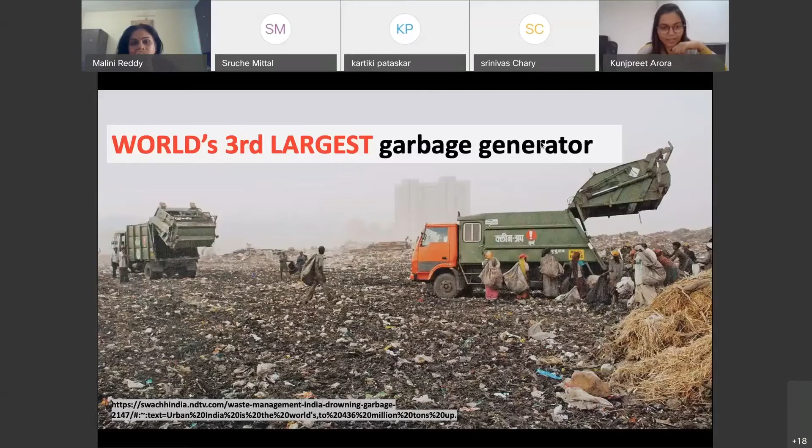As you all know, today India is the world's third largest garbage generator. Plastic is the major contributor to this waste - we produce around 9.5 million tons of plastic waste annually. The second largest waste contributor is 20 to 30 million tons of construction waste.

So here we are with bricks that convert this plastic and demolition waste together using our eco-friendly and sustainable technology to make good quality bricks. These bricks are 30% lighter in weight, 80% waterproof, and 20% stronger compared to standard red clay bricks.

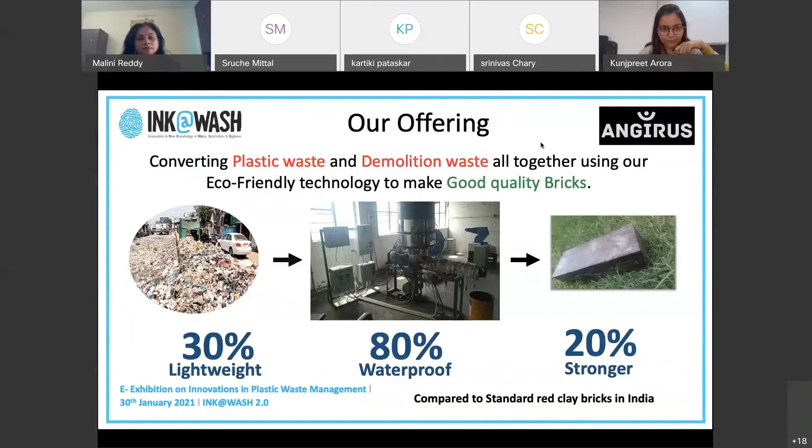Why did we choose the brick industry? Because the brick industry today is the second largest most polluting industry, and India is the second largest producer of bricks after China. It uses 25 million metric tons of coal, fertile soil and water, and only operates for 6 to 8 dry months, making it a highly unsustainable industry for our country.

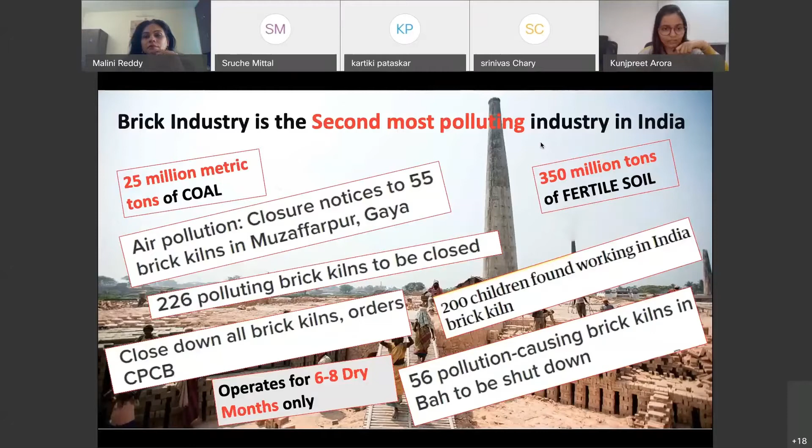If we look at our process, can you play this video? Our process is very eco-friendly and sustainable.

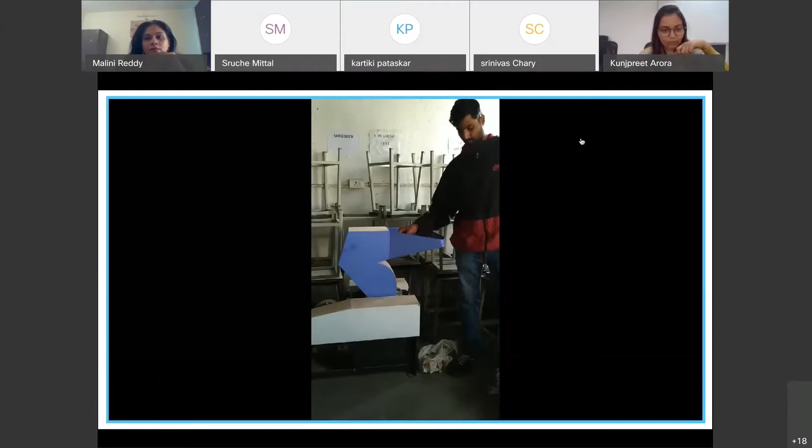It comprises a few simple steps where we use a crusher for crushing demolition waste. Then this waste is segregated and sieved into the required mesh. On the other side is the plastic waste - we use a shredder to shred this plastic waste according to our requirements. This is the shredded MLP PET that we use to make these bricks.

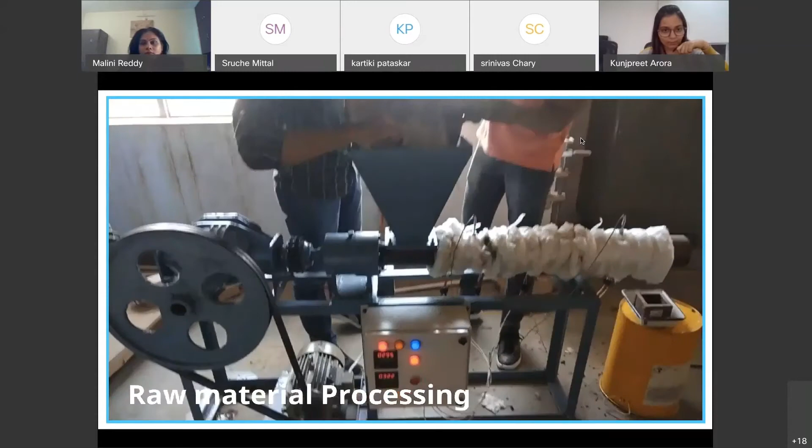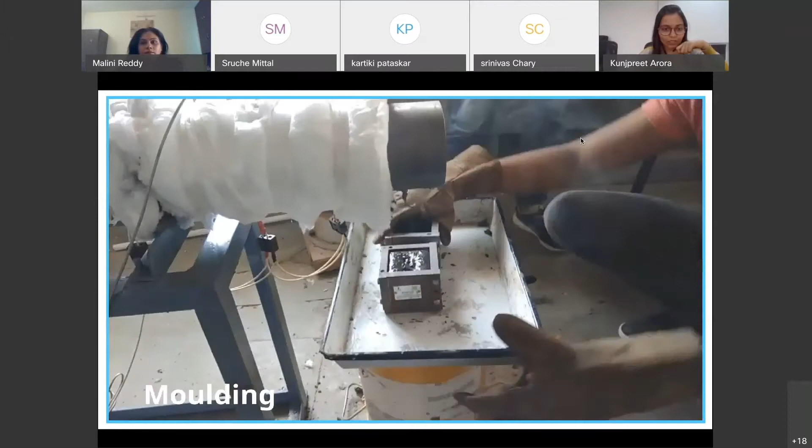It goes to the extruder, which is designed by our own team and for which we are filing a patent. The whole process involves mixing, drying, and compacting, then it goes into molding. Here we show a small cube because it was easy to record this, and then it goes for compression.

So comparing the parameters, why our bricks are better in quality - it's only one day manufacturing compared to other bricks. Also, the bricks are recyclable - you can send them back after 50 to 60 years to the manufacturing unit, get them recycled, and sell them again into the construction industry. It is waterproof, recyclable, lightweight, and the cost, which is the main parameter, is also very equivalent to other bricks.

Even in some areas it is cheaper. If we compare tier 1 and tier 2 cities, it is cheaper than red clay bricks or other kinds of bricks in the market.

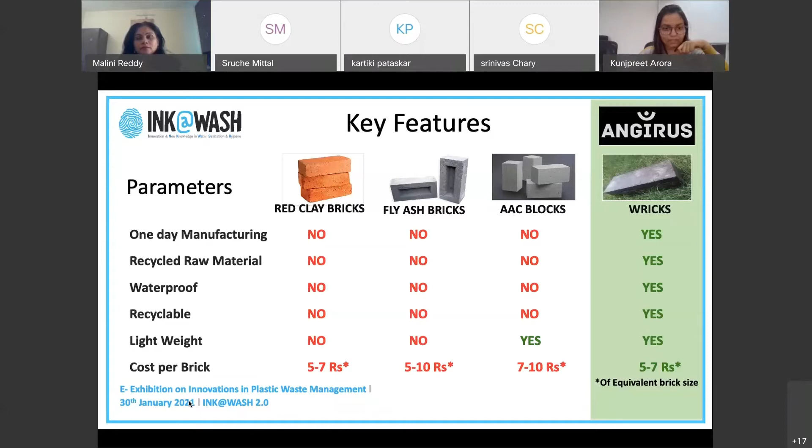We are proposing these bricks for non-load-bearing structures and secondary structures like boundary walls for government schools, public toilets for rural India, and government offices. Also, since these are waterproof, we propose them for sewage tanks and underground tanks. These bricks can also be used for paving in gardens and garden walls.

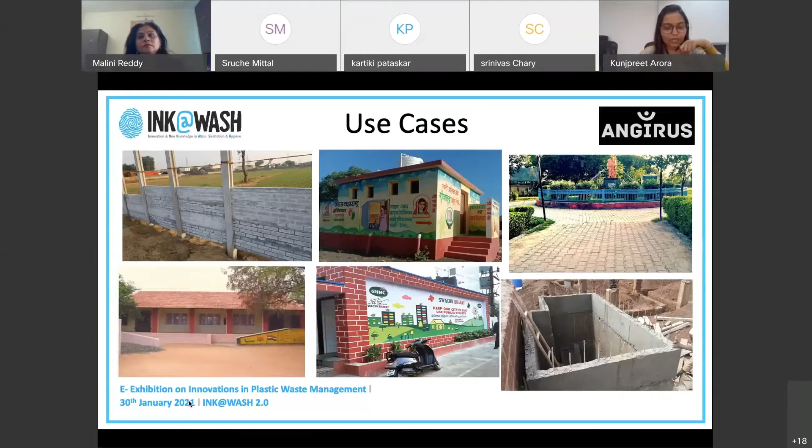We are giving back to society with these bricks, which can be used by local urban bodies. Looking at the initial impact we can create, we are forecasting to sell around 5 lakhs of bricks in 1 year, which can reduce around 1,250 tons of waste per year, generating 25 lakhs of revenue, and hence reducing this whole amount of waste with zero residue left behind.

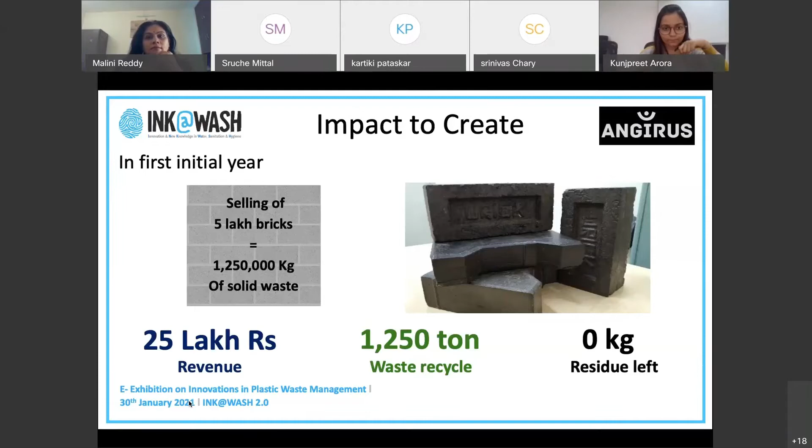It is environmentally sustainable. We are using 100% waste material, including 30% plastic waste. We use no water, no soil, no coal, no cement, or any other chemical - only 100% waste that would otherwise be thrown into the dumping yard or landfill.

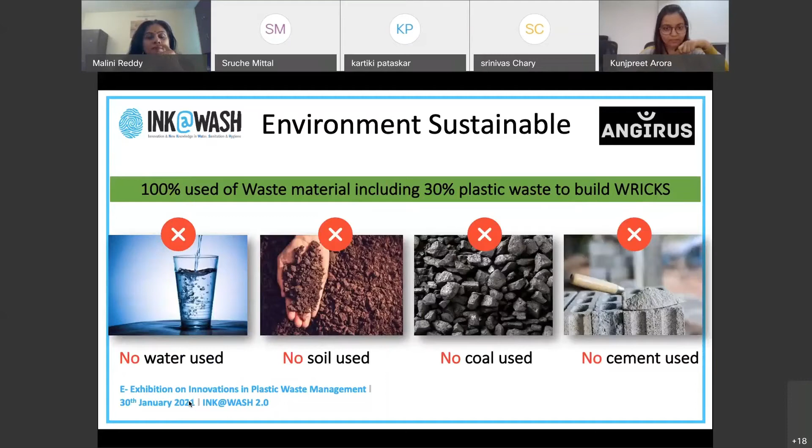These are some of the samples. It is NABL approved, tested in a NABL approved laboratory. The compressive strength is equivalent to first class red clay bricks, which is 10 megapascal, and water absorption is only 4%, compared to red clay bricks which have 20%.

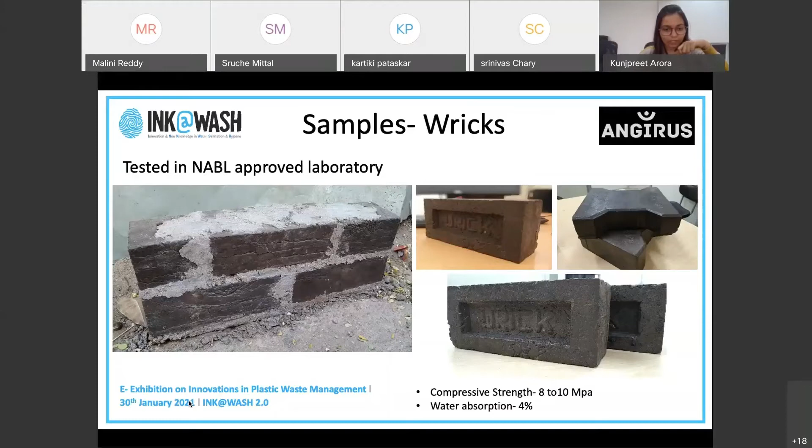Our approach: we need help from local government bodies or urban bodies to provide the waste. This waste is collected, segregated, and sent to our manufacturing unit, Angirus Brick Manufacturing Plant, where we convert plastic and construction demolition waste into bricks, which are sent to contractors and government officials at minimal cost, 5 or 6 rupees per brick. This can be used for affordable housing schemes, RPM schemes, schools, public toilets, community structures, infrastructure, etc.

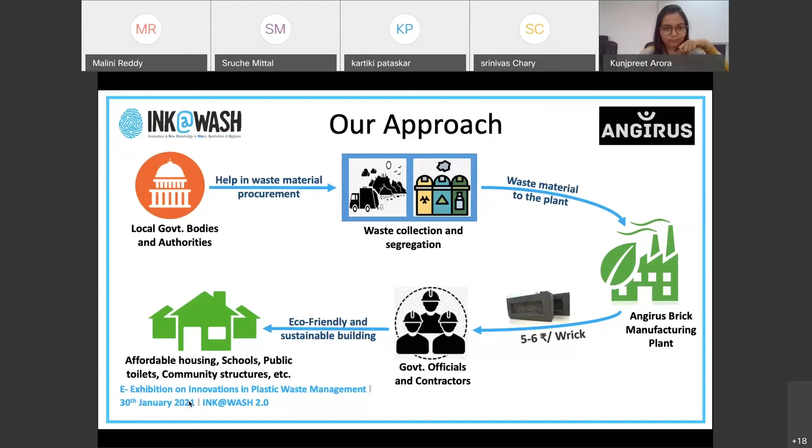Now I leave this to you to choose smartly. Do you choose red clay bricks, which release 100 grams of CO2, or do you want to use our bricks, which use 2.5 kg of waste, including 30% plastic waste?

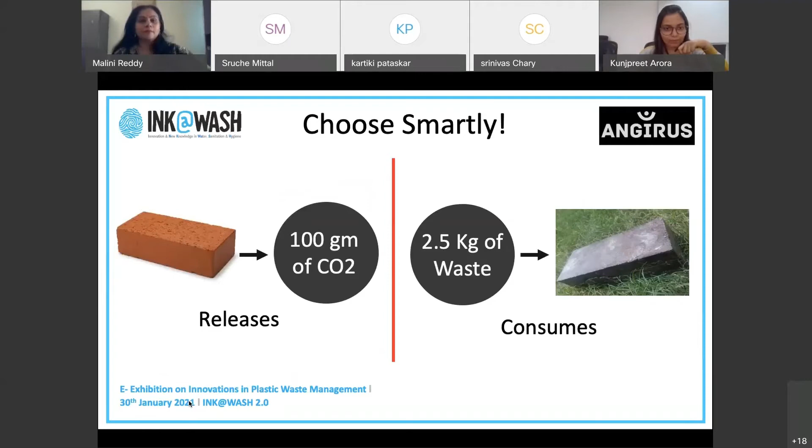Our vision at WRICKS is to help brick manufacturers by providing eco-friendly and sustainable technology, while also helping government and urban bodies with waste management problems—not only plastic waste, but also other municipal and industrial waste—and solving the central government's problem of air pollution from brick kilns.

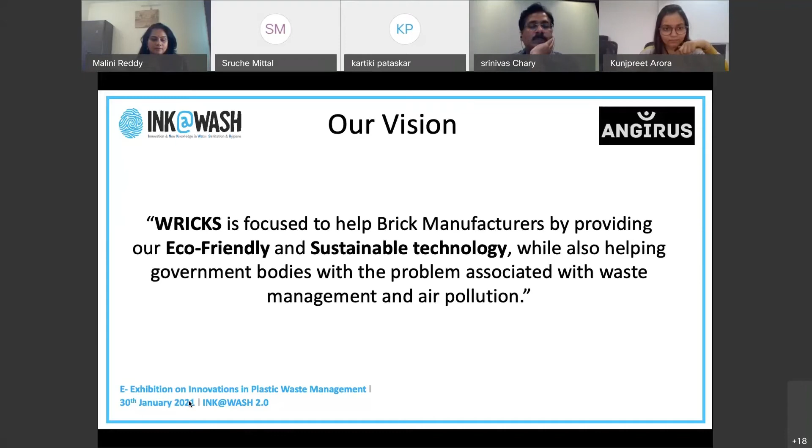We have recently incorporated and are recognized by Startup India. We have also secured an operational construction demolition waste plant from Udaipur Municipal Corporation to make bricks in partnership with them for the supply of waste. We have also received our first initial order of 30,000 bricks, to be fulfilled next month. We have also received grants of around 20 lakhs from organizations like AICTE, IIT Madras, and Eco Grants.

Our team comprises Lokesh Puri Goswami, head of product development; myself, head of business operations; and our mentor Dr. Pankaj Purwa, principal at Techno India.

We have been recognized by Dainik Bhaskar, the New Indian Express, Daily, and Better India magazine, and also by Your Story, and supported by various other organizations like IIT Madras, IB Hub, Center for Youth, IIM Udaipur, and AICTE.